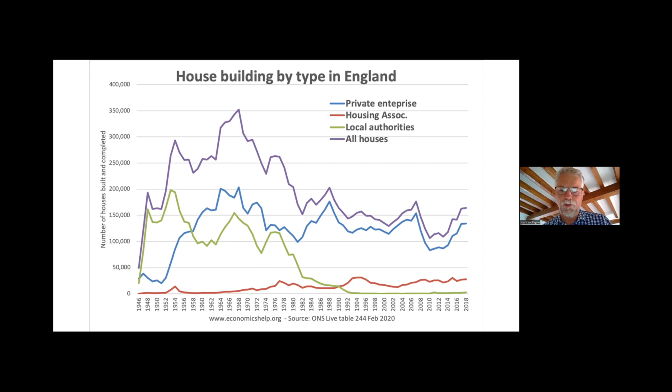But we've also got a problem around the quality of what we build as well. And that's both in terms of design, in terms of placemaking, in terms of traffic, sustainability - a whole bunch of aspects where, quite frankly, our house building isn't up to where it should be. It's not as low carbon as it should be - it should be zero carbon, it isn't. It's not as good for the customer as it should be. So we've got some serious issues there, and we've actually got some serious issues around the quality of house building as well.

This is poor Persimmon, who got picked on, as you can see, in August 2019. It's not just them, it's plenty of others, but there was a particular focus and a report done on the quality of their house building. Anybody who's bought a new house, we talk about snagging. Snagging is tolerated in construction, whereas it would not be in other manufacturing industries. They do not allow the lack of final quality before you give the house to the purchaser that other industries do.

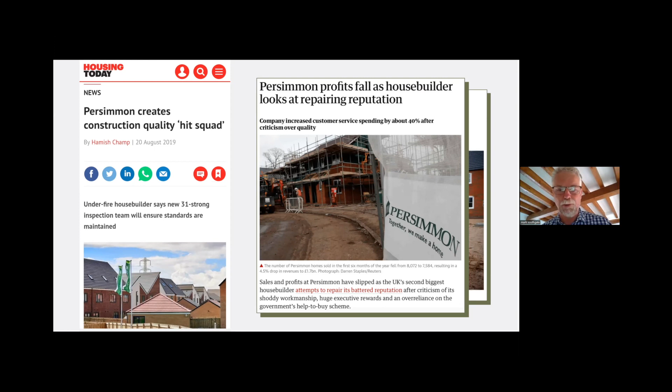So there's a real focus here and need to improve that. And then the final problem, which isn't a housing problem, but is a problem for getting new entrants into the industry, is construction has this image of being a wet trade, not particularly great environment to work in. In schools in the UK in particular, if you think of construction, it's either going to be architecture or go and work in construction. That tends to be focused on white males, relatively not academically focused because they're more tactile and use their hands, and it's not seen as a very positive profession to go in. So we need to change all of those things.

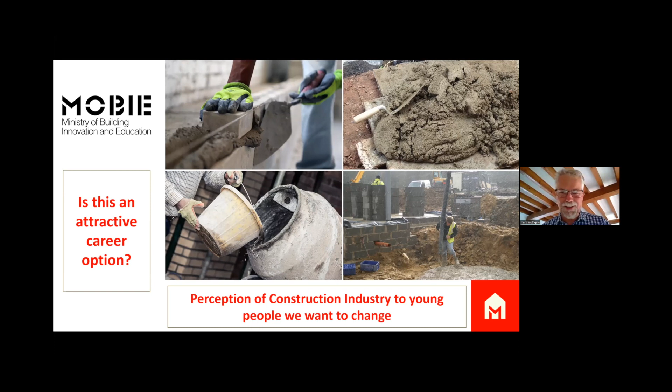So no small job. What we're trying to do is get greener, healthier and fairer homes, and do that through design challenges with young people, through education pathway, and through working with industry. I'll cover each of those quite briefly as an intro.

In terms of education, I think there's three elements to modern construction which anybody entering the construction profession or built environment professions should have now, and actually people who are working in it should increasingly become familiar with and confident in. One is digital, obviously, increased use of digital in terms of design, but in terms of management of buildings, in terms of digital twins, in the way you construct buildings.

This is where modern methods, I think, particularly comes in, because of the manufactured environment of modern methods of construction. What is built should bear almost 100% resemblance to what is on the plans and what's in the digital designs. That is not the same with traditional construction. So MMC is a real way of unlocking digital and creating that parallel and that ability to rely on digital drawings and run buildings using digital information and building information systems.

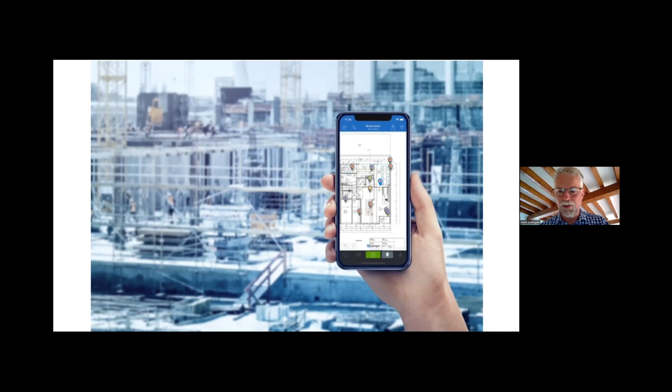Second one is sustainability. This is the sort of UN sustainability goals, but a particular focus on zero carbon, on climate adaptation that we've seen with extreme temperatures we've had, flooding, some of those other issues. So how are we dealing with it, both in terms of reducing the embodied carbon in buildings, reducing the carbon that we need to run them, and adapting to the inevitable impacts of climate change that we've already set in place.

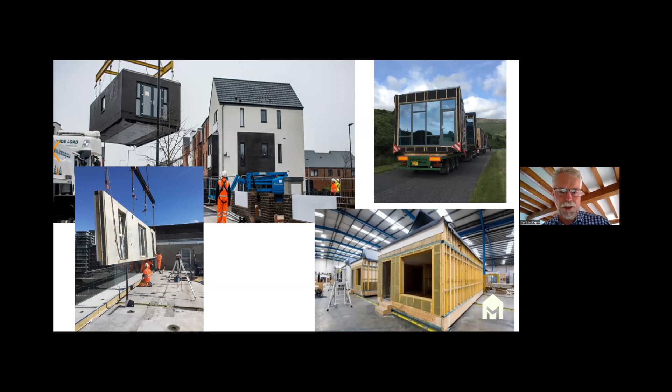And then finally, it's how does modern methods, be that off-site, volumetric, panelized components, whatever aspect of volume MMC, how can that help us improve our house building and increase the quality and quantity?

So a couple of management consultants, McKinsey and Savills, reckon that by the end of this decade, around about 20% of UK housing will probably be delivered through modern methods. It's around about 9% now. So that's going to help in that growth in housing, and UK government is very interested in that because it can increase the amount of housing supply in the United Kingdom and help it reach that

300,000 homes target. So what's MOBIE doing? Rather than talking about it, we've tried to bring some of that education in. So we've got schools engagement. I'll come back to that in terms of our design challenges and some work we're doing with primaries.

We're working with Pearson, the education company, around, we've created some modules for their BTEC in construction and built environment to add more modern elements and housing elements to it. We've just agreed, from September 2023, there'll be a certificate, higher national certificate in modern methods of construction available through Pearson.

So people who want to specialise in this area can specialise. And we've got bachelor's, master's, and indeed a PhD programme as well, all looking at different aspects of housing design from an interdisciplinary type approach and trying to shake up the way we do things. So that's part of what we've done. It's focusing on digital skills, manufacturing approaches and technology, different methods and materials, sustainability and low carbon, and retrofit. Those are the sort of areas that we're majoring in on now and think should be part of any modern construction learning. So with Pearson and the BTEC, we created 4 new modules, which are optional units.

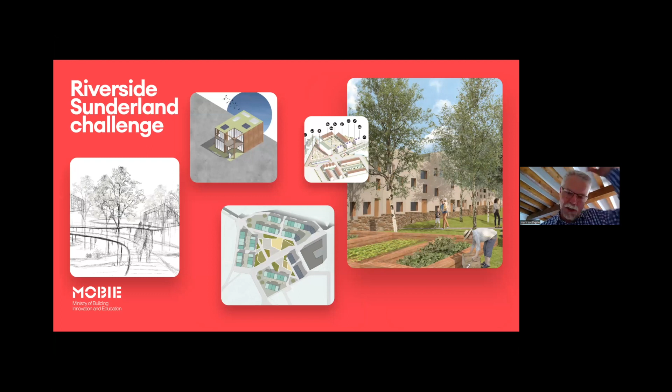Here's another example, more at university level - universities around the UK, including some university students in Ireland as well, done all throughout lockdown, teams working in isolation, but they produced some amazing stuff.

And this was multidisciplinary. So the other thing we're quite passionate about is it's not about individual disciplines. I'm a planner by profession, but we need to work with loads of others. So we have planners, architects, quantity surveyors, landscape architects crucially - you'll see this in the designs, green elements were in from the beginning - and engineers, all working together on a site in Sunderland to create a new neighbourhood.

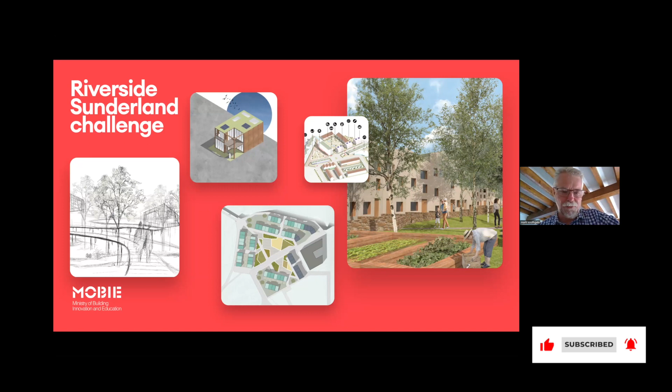Some amazing designs came through this, but they all enjoyed multidisciplinary working. And we know that when you leave college, that's the thing you'll be doing. When you go into practice, you're working in multidisciplinary environments.

Another example, the London Challenge we've just done - again, some amazing design coming out from the young Londoners. And again, the whole point about this exercise was to capture people who are representative of the population of London, so actually getting a much more varied and diverse workforce within the built environment in London.

And then finally, and I will then pass back to Alan - industry partnering. So one example, on the research side, is we've worked with Sunderland City Council and Sunderland College. We put in a joint bid to government for levelling up funds, as they describe it, and we are creating this new Housing Innovation and Construction Skills Academy, where we bring together a lot of the house building that is going on in Sunderland as part of regeneration.

Their aspiration is that a lot of that is modern methods of construction, bringing in a modern methods construction manufacturing facility into the city, which has a rich history of manufacturing in any case - shipbuilding, glass making, Nissan car manufacturing, etc. - and bringing all of that together in a learning environment where we're teaching a new generation lots of new skills, showing them on site and giving them direct employment in the locality.

And I think this is a model that can be repeated elsewhere. That's what we're trying to show, that this could be replicated in any major city in the country. Maybe apart from not everybody's going to get a manufacturing centre, but actually that ability to use development and train people using existing resources and existing skills is really important.

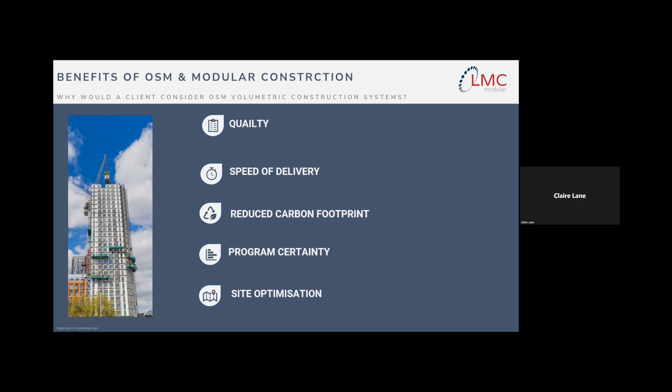If you think about target markets, offsite isn't just suited to the housing sector, it's suited to many other sectors, which will help relieve the pressure on the overall construction industry. It's an extremely attractive venture from a risk management perspective because of its flexibility.

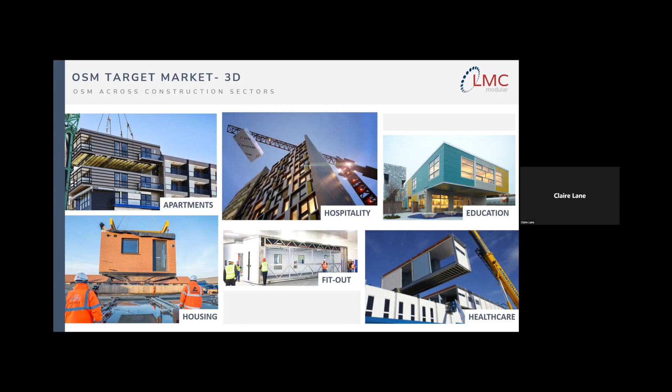Repetition and a continuous pipeline for the factory are key to realising the efficiencies achieved from offsite manufacturing, and it's one of the reasons it's particularly suited to the housing sector. With clever design, repetition can be achieved across many sites as opposed to just one development. Although developments may look similar from the outside, repetition can be built into the internal layouts with many repeating elements, and you can alter the aesthetic to suit the particular area the housing is going into, but we're keeping repetition in the footprint.

So just a quick overview of the modern methods of construction, because I tend to focus a lot on offsite manufacturing since that's the area we're working in, but there are a lot of other categories as well. I won't run through them all, but to give a brief overview, there are pre-manufactured led approaches - these would be your offsite - but also in modern methods of construction, you have site-led approaches.

Category 1 is your 3D volumetric modules - this is where our modular building system lies. Category 2 are your panelized offsite systems. Category 3 includes things such as pre-manufactured staircases, precast floors, prefabricated roof trusses. Category 4 is additive manufacturing, so this would be things like 3D printing of concrete.

Category 5 are non-structural sub-assemblies - again, we work in this area with our pod factory. Category 6 are things like brick slip panels, things that reduce skills required on site. And category 7 would be site labor and productivity improvements - things like exoskeletons that allow laborers to carry more material, reducing the amount of injuries and the number of trips they have to make.

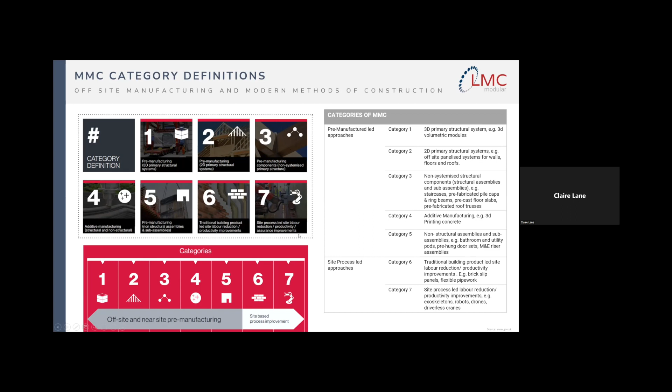So now just a quick look at the challenges facing offsite manufacturing. I've mentioned already the cultural change or mindset - this is going to take time, and it's going to take a lot of exemplar examples in the Irish context before it is fully accepted as being a norm in the house building sector.

Supply chain is also another challenge. There's benefits, obviously, of using repetitive materials, but there's also risks because you have fewer suppliers. You don't have backup suppliers, and if you're tied into certain materials because of, for instance, fire testing, you don't have the option of picking an alternative supplier.

You're tied to a certain supplier. So the early design freeze, although it has a lot of advantages in terms of the program, it can also be a complicated approval process. You need a lot more resources up front, a lot more time up front in the design than you do in a traditional contract. And there needs to be a realization of that from the client's point of view, and they need to understand the different contract model that is required.

I'll go through that in a bit more detail in a while. And similarly on the financial model, I'll touch on that in a later slide, but it is a different financial model when you're thinking modular offsite manufacturing than it is your traditional model.

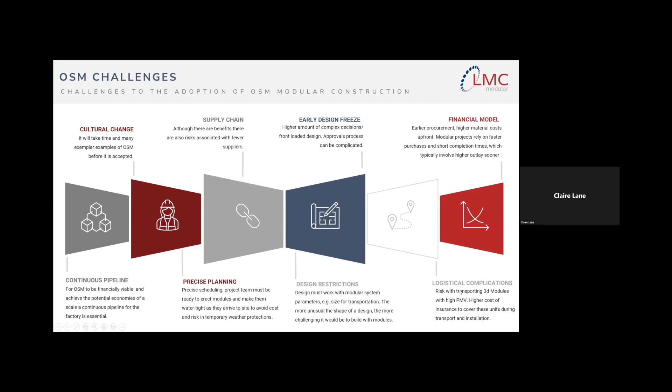I've kind of touched on the logistical complications there as well. So I mentioned the change of mindset that's required for designing for manufacturing. Offsite manufacturing is often viewed as bringing construction into the factory, whereas it needs to be viewed as manufacturing in a factory environment for the construction industry. We need to design for manufacturing in the factory rather than manufacturing what has been designed for construction on a building site.

Early design decisions are critical. The client needs to understand the rationale and the benefits of this. Traditional design changes at procurement or construction stage will not be effective as modules will already be in production. So the client and design team need to understand that decisions need to be made earlier in the process and that these decisions need to be finalized decisions. But there are advantages to this - it mitigates the risk of delays caused by late design changes that you see in traditional contracts.

Similarly, any value engineering needs to happen at an earlier stage in the design. You need experienced designers and experienced project managers to ensure the success of this. Every detail needs to be considered along with its cost implications. Small design changes can make a big difference when you think that the change is affected over multiples of hundreds of modules.

Design for manufacture is critical to achieve production efficiencies, but also to ensure adequate quality assurance and quality control is built into the system design, and that you've considered all the safety of your work practices in the factory and in assembly on site, and designed for these accordingly.

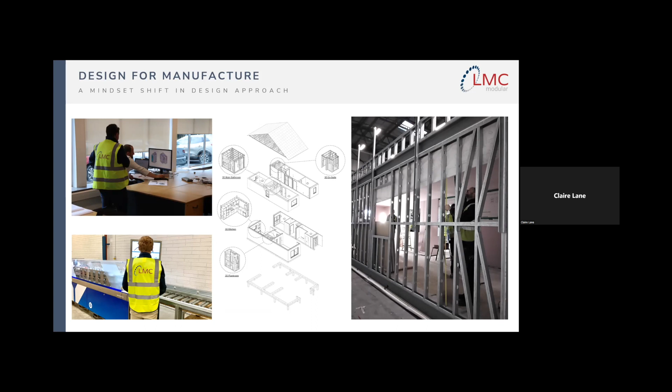So I've talked there a bit about why it's important for the client to be aware of the advantages and the risks involved in choosing modular over traditional construction, or vice versa.

For example, the water intrusion and its effects on quality are much higher in an open construction site, whereas offsite manufacturing, it's occurring in a dry roofed environment.

We were recently doing a prototype for a project in our factory, and we got a roofer to come in to roof the module in the factory, and he commented that was the first time he'd ever roofed a roof already in a roofed building. So it has its advantages.

The factory as well, it doesn't need to stop production due to adverse weather conditions, whereas a site would be more susceptible to the weather.

Off-site is less affected by the skilled labour shortage than on-site. I mentioned before that you can pivot to suit the skills that you do have.

Modular construction is more susceptible to material delays, though, as often materials are system specific and cannot be replaced with similar materials due to fire testing. You know that you've tested with a particular material in the fire test, so you can't replace that with another material and still guarantee the same performance.

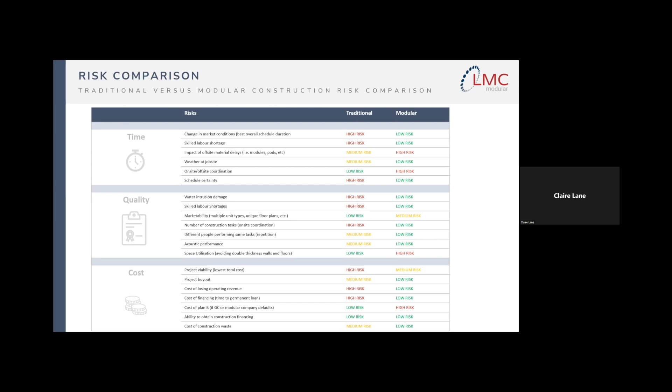So I did talk about the contract models, and I suppose the difference in it for an offsite modular build versus a traditional build. So you need to think about the differences in it, and the client needs to realise that there is a big shift in how the contract is applied when it is an offsite manufacturing project.

Like the client would initially engage with their project or cost manager to assess if the proposed project lends itself to offsite manufacturing. If it is decided offsite manufacturing is the most suitable route, an appropriate design team and offsite manufacturer should be engaged to ensure that the offsite manufacturer is involved in the early design.

Concept designs are developed within the construction method that you've chosen and within the design parameters of the system that you've chosen to build within. The project team, in conjunction with the main contractor, become the project delivery team, and early engagement of the offsite manufacturer is key to the success of this.

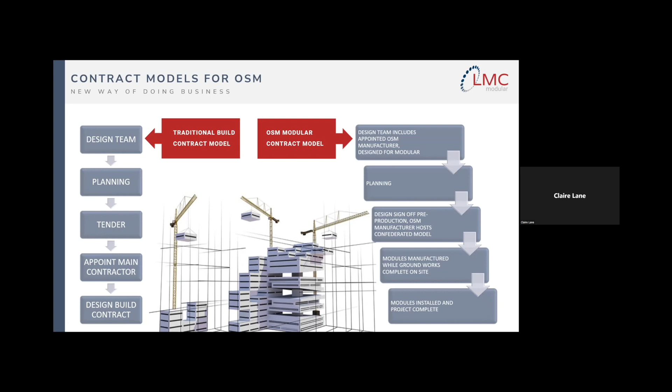Offsite manufacturing really is different because you are front loading the design side of it. You're making all your design decisions earlier in the contract, and that's really important for the client to understand, and to understand that the design side of the contract is consolidated, because you're not making decisions throughout the project, you're making decisions earlier on in the whole process.

So I suppose this chart probably shows that a bit clearer. So you have this, the red line here is indicating your modular cash flow and decision making, and then this line indicates your traditional.

So for instance, if we look at your modular, you will be making design decisions much earlier on, whereas on the traditional construction, design decisions are still being made out here, and the finishing date is dependent on those design decisions and the delays that those design decisions cause.

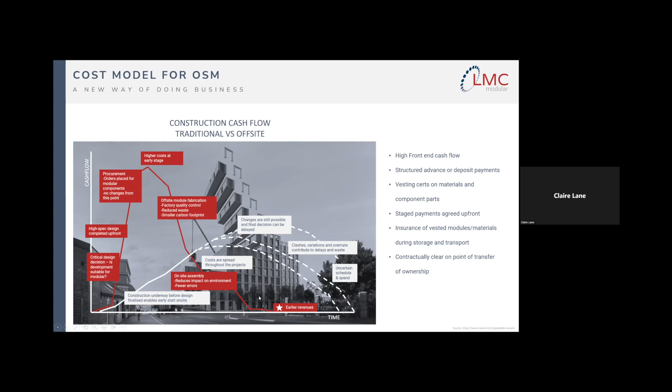Whereas because of the earlier design decision with modular, you end up with a much steeper construction curve, and you get finished much earlier. I'm very conscious of the time, so I better finish up and hand back over to you, Alan.

Sorry about that. No, that's very good. And what's really shining out for me, thanks very much, Claire, is this need for strategic investment in training.

Yes, that's very important. Yeah, and it's right through all aspects. So I suppose a lot of people think about upskilling the existing workforce, and they think about upskilling our new graduates.

But a lot of people don't think about the client side of it, and that you need to bring the client along with you on this journey. The client needs to understand everything that's relevant to their decision making when it comes to offsite manufacturing and modern methods of construction. There's probably a need for a community of practice to come together.

I know there are some plans around that in Ireland. And just before we come on to our last speaker, Liz, who'll be talking about the skills needed for this new way of thinking, you said a number of times that you need pipeline.

Yeah, and of course there's been a lot of failed dreams in this industry internationally in the world of MMC. I'm just wondering, are MMC companies, perhaps those that haven't survived, were they perhaps inflexible and not adaptable enough to a changing sector? We're not a manufacturing industry, so there has to be flexibility. You can't say this is the product I make and you have to procure this exact product.

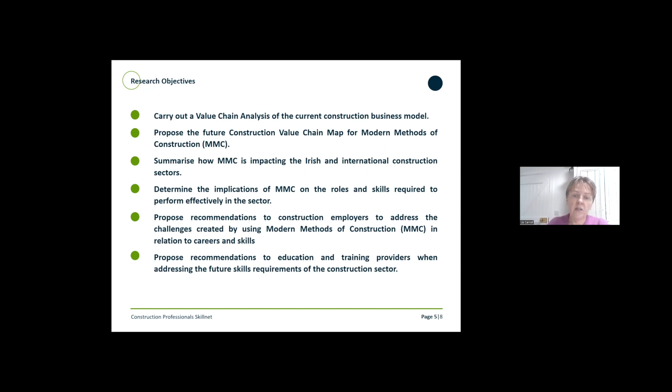Secondly, collaboration skills - that really spoke highly of supply chain management, and the whole mindset around supply chain management came out prominently for me. Quality assurance and control, as Claire was talking about, that it's under factory production so there's high quality assurance, much easier to manage, and being able to deliver to specific standards.

Also, as Claire was talking about, the requirements around planning and scheduling - it being a lot tighter and not so flexible, since you have a design freeze up front. This also impacts the collaboration required, because everybody needs to be involved up front, and then the additional logistics required around that as well.

And then the underpinning of digitization of the sector - the likes of BIM, data analysis, data analytics being involved, and also some regulatory knowledge.